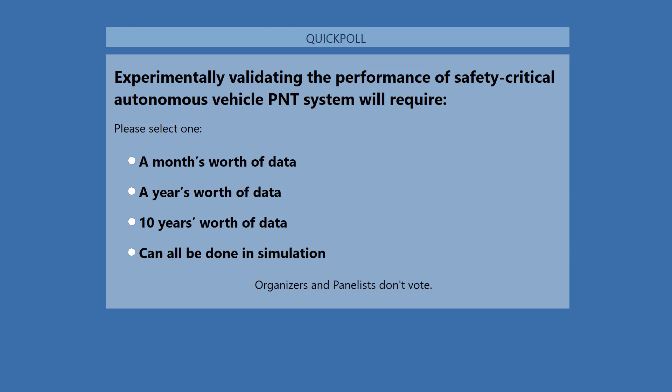Absolutely. Folks, coming up on your screen is that first poll: experimentally validating the performance of a safety critical autonomous vehicle PNT system will require. If you wouldn't mind going ahead and selecting one of the following responses: a month's worth of data, a year's worth of data, 10 years worth of data, or can all be done in simulation.

So looks like we have 1% weighing in with a month, 39% saying a year, our front runner there, 32% saying 10 years, and 27% saying it can all be done in simulation.

Demoz, any thoughts there on the responses? That's an interesting spread, and I think quite a few of our audience members are going to be kind of surprised by what they hear today from our panelists.

So let's go ahead and dive into our first presenter, and it's going to be Matthew Spenko, who is an associate professor in mechanical materials and aerospace engineering at the Illinois Institute of Technology. Professor Spenko earned a BS degree in mechanical engineering from Northwestern University and a master's and PhD in mechanical engineering, both from the Massachusetts Institute of Technology. He was an intelligence community postdoctoral scholar at the Mechanical Engineering Department Center for Design Research at Stanford University from 2005 to 2007. Since 2007, he's been a faculty member at IIT.

His research is in the general area of robotics with specific attention to mobility in challenging environments and navigation safety. He's a member of the IEEE and an associate editor of the Journal of Field Robotics. His work has been featured in many popular media outlets such as the New York Times, CNET, and Discovery News. And examples of his work are on display at the Robot Revolution, a traveling exhibit currently at the Oregon Museum of Science and Industry. Matt, welcome.

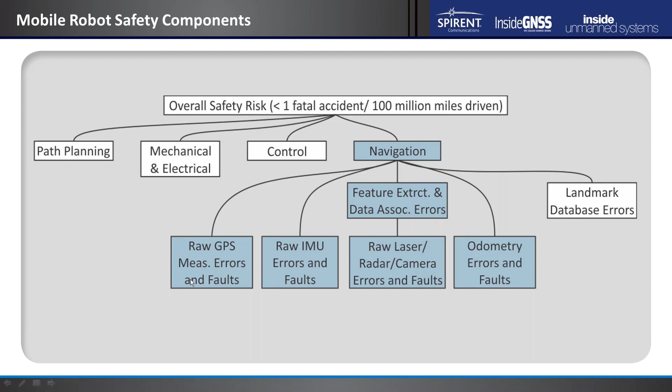And then over on the right-hand side here, we have landmark database errors. Obviously, the map that you have of your landmarks may contain errors, but again, we don't really focus on those. We really focus on these terms in the light blue boxes right here.

One of the things we want to ask ourselves is, before we go off and do any analytical work, can we do this all experimentally? There's a lot of different analysis done on this.

I'm presenting some work done in 2016, and the authors posed the question: how many miles would have to be driven without failure to demonstrate with 95% confidence that the failure rate is less than the current failure rate, or 20% better than the current failure rate?

And the failure rate I'm talking about here is fatalities, automobile fatalities. In the US alone, it jumps between about 35,000 and 40,000 auto fatalities per year, and about 90% of those are attributed to human error.

And when you look over on the right-hand side here, you see these large numbers of miles, 275 million or 11 billion miles. These are huge numbers.

And when you look and see what the manufacturers are doing, we're not even close. I think Waymo just announced, maybe a month ago, that they're up to about 8 million miles driven, which is extremely impressive.

And there is—so I don't want to take away from that—but even if you don't agree exactly with these authors' analysis, you're still looking at orders of magnitude difference between what we're able to achieve and what we actually need.

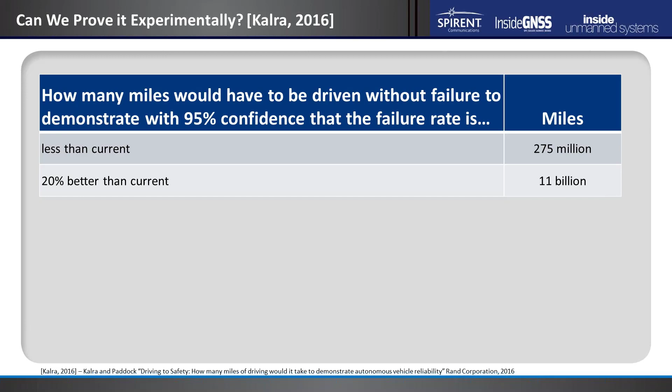And the real kicker here is when you want to prove safety through experimental work, you can't make any changes. So anytime you make a change to your algorithm or update your sensor, you've got to start that clock over again. So instead of doing that, we're looking at taking inspiration from the aviation industry.

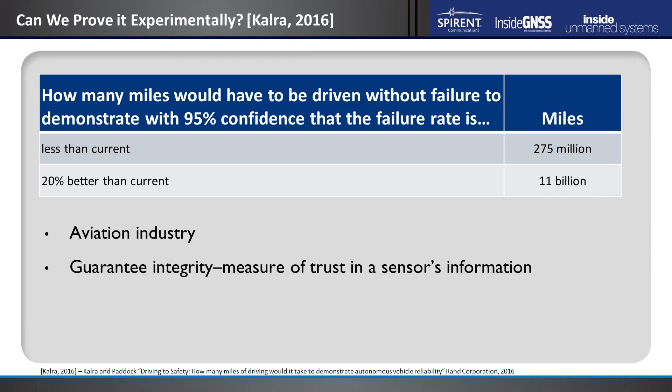I don't come from aviation and the navigation safety community—I come from a robotics background. My collaborator comes from the aviation side, so we're looking to take inspiration from him and look at guaranteeing integrity, which is a measure of trust in a sensor's information.

So there are some distinct difficulties in adopting aviation safety methods to terrestrial robots. Up here on this chart, I have an example of what we're trying to do. We have a robot on the left that's our current time pose. Pose is position and heading.

And on the right, we have some future—we're going to predict our pose into the future. And then we have an alert limit requirement box. So basically what we're trying to ask ourselves is, what is the probability that our future pose is going to lie outside of that alert limit requirement box?

And for a self-driving car, this might be—let's say the lateral limit might be the size of the lane that you're traveling in. So we have three unique challenges here when we're trying to adopt these aviation standards or techniques into ground robots.

The first one is that GNSS alone is insufficient. We are going to be operating in a lot of GNSS-denied areas, and thus we need the multi-sensor system, the sensors that I talked about a couple slides ago.

The second one is that in aviation, our integrity risk peaks at landing, and that is no longer the case. We now need to have continuous risk monitoring for terrestrial robots.

The last one is that we have unpredictable measurement availability. In aviation, you're landing on well-defined, carefully maintained airports, and you can control the environment extremely well.

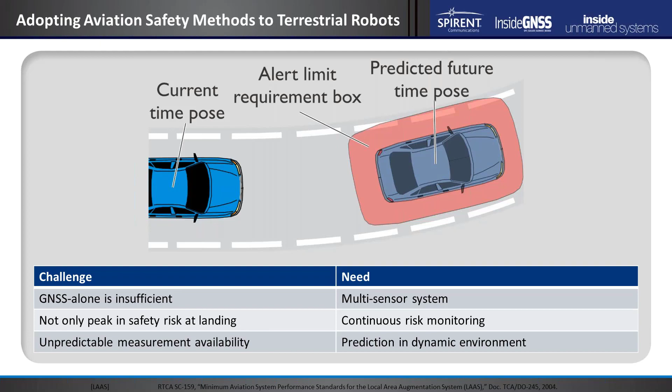In mobile robot applications, we need to operate in a dynamic environment. We have construction going on, we have people walking in front of landmarks and features that we want to extract, we have other cars, we have cyclists. So we have all these dynamic moving environment elements that we have to account for.

So to give you an example of what I'm talking about with feature extraction and data association, this is just a simple test we've done. On the left-hand side, we've got a little cart that has LiDARs, GPS, and an inertial navigation system on it, being pulled around in a field with trees. On the right-hand side, you can see the LiDAR point clouds, and everything popping up in red is a feature we've extracted from the environment.

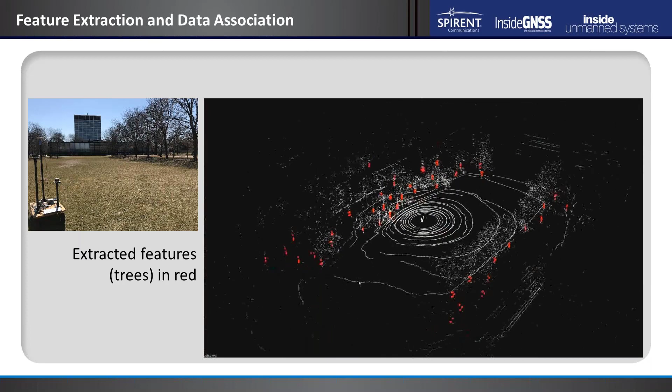These are going to be associated with those trees. You can see some of these features popping in and out depending on the data frame. As this vehicle moves around, these features are moving in and out of our field of view, so a lot of challenges just in that.

So what are some of the faults that might occur in feature extraction and data association algorithms? We call them landmark faults, and we can break them down into two categories. The first one is a feature fault, meaning a landmark is associated with a wrongly extracted feature.

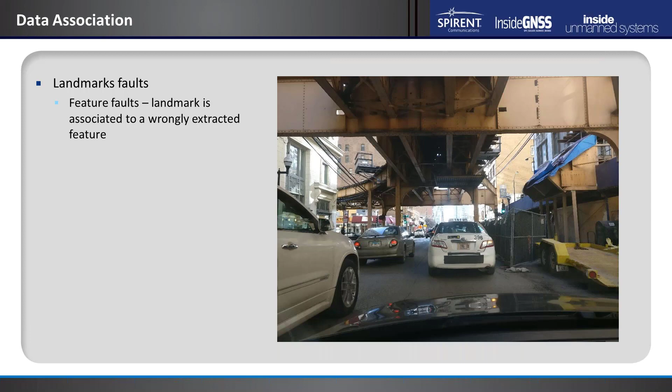On the right-hand side here I have a picture I took from my car in downtown Chicago. This would be a very difficult scene for a self-driving car to operate in. You can see our L tracks overhead, and even without them we'd still have tall buildings creating a GNSS denied environment. We also have construction and a lot of cars moving.

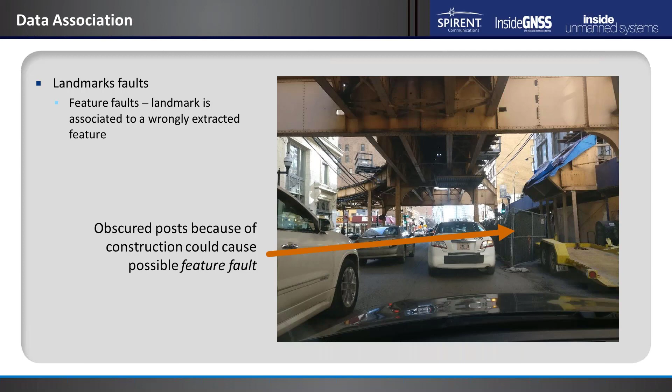When we take a look at these feature faults, one example might be that we have some obscured posts we'd want to extract, that we'd expect to be there, but we have all this construction on the right-hand side. So these might cause a possible feature fault.

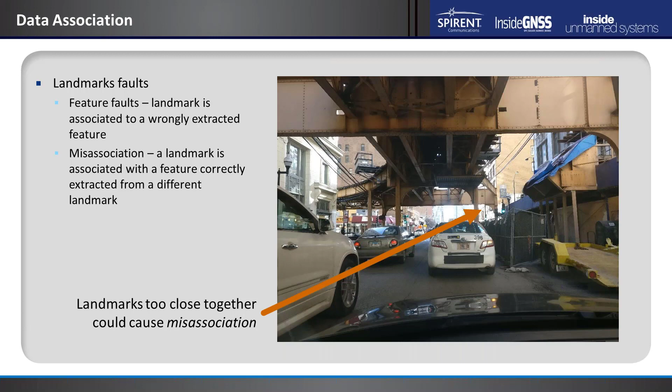The second type of landmark fault is a misassociation fault, where a landmark is associated with a feature correctly extracted from a different landmark. An example of that might be posts that are too close together, which could cause a misassociation.

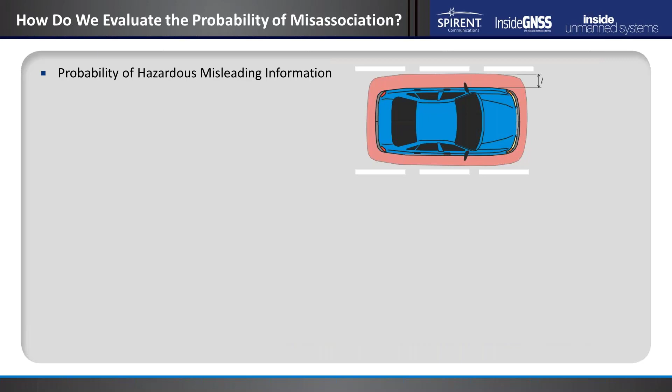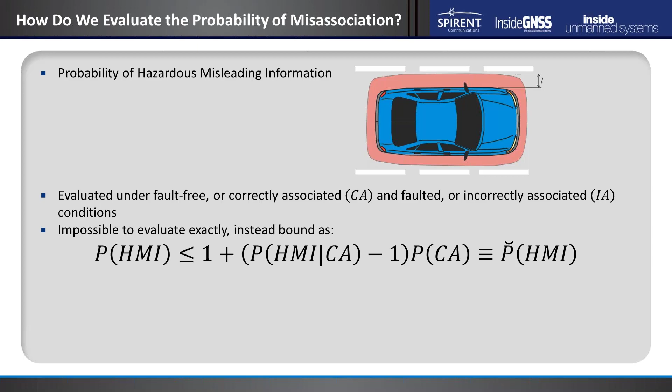So how do we evaluate the probability of hazardous misleading information from misassociation? We're looking at, like I talked about before, the probability of being outside that alert limit box. We evaluate it under fault-free and incorrectly associated conditions.

Now I'm going to throw a couple equations up here. Don't get thrown off by them. We're going to look at a couple terms and see what we can tease out of them. One of them bounds our probability of hazardous misleading information — this term on the right, which is set by some safety requirements from a regulating agency.

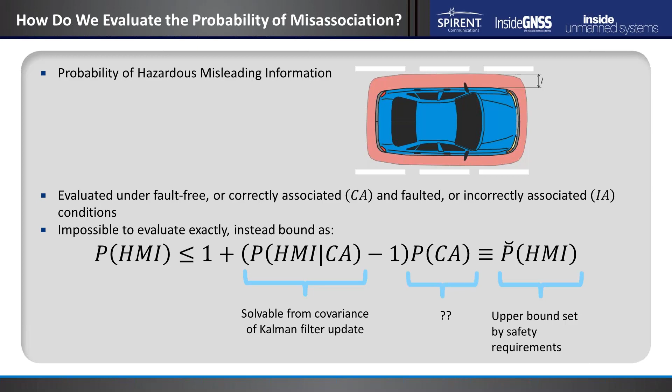Then we have two more terms. One we can solve from our Kalman filter covariance. The second one is the key though — this is trying to identify the probability of making a correct association with these landmarks.

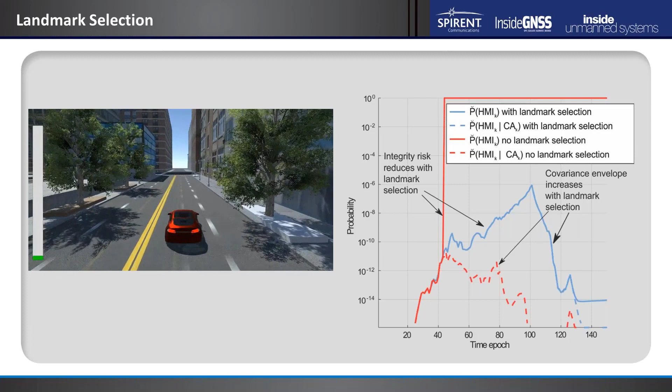But if we look at this solid blue line, we're actually calculating our probability of hazardous misleading information while accounting for landmark separation, and we're then able to lower our probability of hazardous misleading information by essentially throwing out landmarks that aren't well separated.

So to finish off, I'd just like to acknowledge my students in my lab, especially Guillermo Arana, who most of this work is based on, as well as my collaborator, Professor Mathieu Joerger at the University of Arizona. So now back to you, Demoz.

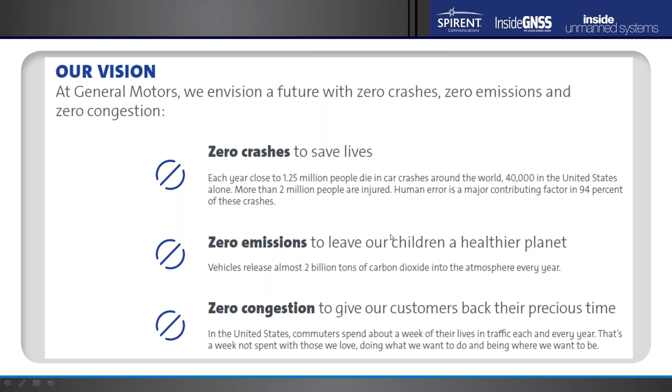Our mission and vision within General Motors as a global car maker is summarized in this slide. When we wake up in the morning and commute to work, these are the thoughts that drive and motivate us in this rapidly changing world of automotive transportation. We have a vision of zero crashes, and robotic principles and autonomous vehicles factor into that. We have a vision of zero emissions, so we'll continue to invest and lead in electric vehicles. And we have a vision of zero congestion. So as the world becomes more urban and greater dependence on ride sharing becomes more pronounced, GM's committed to being a part of the solution for the 21st and 22nd centuries.

So I wanted to do a survey here of sensors that are found and used today on autonomous and semi-autonomous vehicles, and talk a little bit about the pros and cons of each of these sensor types.

At GM, we view sensors in two categories. We have perception sensors that use remote sensing capabilities to localize a vehicle in a relative sense. How far away am I from a curb or a stop sign or an intersection? We solve that problem with radar, LiDAR, and cameras. Then we've got another classification of sensors responsible for positioning the vehicle in an absolute sense with respect to a well-established reference datum such as WGS84 or ITRF 2000. Where is this vehicle on planet Earth with a prescribed latitude, longitude, and elevation? We perform those functions with high definition maps, with motion sensors such as gyroscope, accelerometer components, wheel ticks, and of course GNSS.

GPS, GLONASS, Galileo. A few years ago, I'd say 18 to 24 months ago, there was a debate within the automotive industry about which class of sensors was more important. What I've come to realize, and what we've learned at General Motors, is it's really not an appropriate question. What we've come to believe now and are committed to is we need all of these things. There is value and purpose in relative positioning, a vehicle with respect to known landmarks and objects on the roadway, and there's high importance in absolute localization - where is this vehicle with respect to a map that gives us a good perspective of the road ahead?

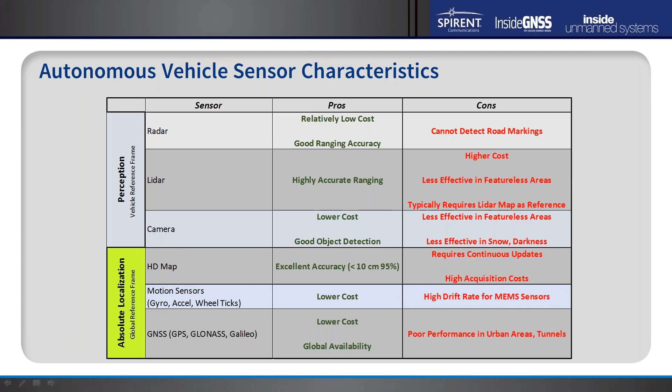These components on a car typically have lower costs and global availability. As Matthew mentioned in his presentation, GNSS suffers in urban areas and tunnels, and these are areas where customers are not going to be forgiving of issues with autonomous vehicles. So we need to complement the weaknesses of GNSS with the other sensors on this slide.

So this is a pictorial view of how we fuse information from these disparate sensors into a combined solution. On the left side, I've grouped again our perception sensors: LiDAR, camera, radar. On the right side, we complement those relative positioning sensors with absolute localization sensors, including GNSS, inertial measurement units, and a precise map.

If we go counterclockwise here, LiDAR, as I mentioned before, is characterized by creating a point cloud picture of your surrounding environment using laser returns, where we look at the reflected intensity and range of return of those signals to construct an artificial reality.

Cameras are similar. Camera can perform signal processing to identify object data, such as paint stripes or road signs, that can be cross-checked against a database of those objects stored in a map. And then radar is an excellent sensor for long-range and short-range detection of both permanent and stationary objects.

On the right side, I've spent a lot of my time over the last several years improving GNSS. What we've learned here at General Motors and what we've publicly advertised is our ability to achieve more precise localization by applying corrections. Our Super Cruise vehicle, which I'll show a slide for, achieves superior location performance by applying real-time clock, orbit, ionosphere, and troposphere corrections to the raw observables that we receive today from 2 constellations.

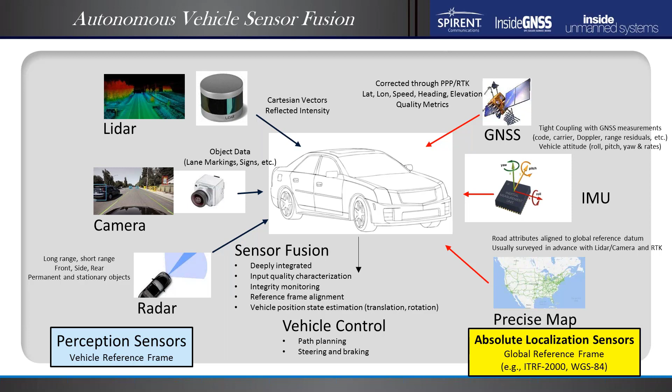So when we know where the car is, that allows us to perform the control functions such as path planning, trajectory control, steering, and braking, those functions that are a critical part of any autonomous car.

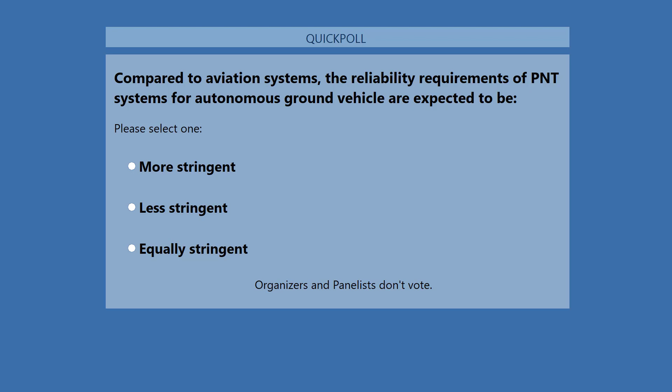On the screen, we've got that second poll. Compared to aviation systems, the reliability requirements of PNT systems for autonomous ground vehicles are expected to be more stringent, less stringent, or equally stringent.

Well, what do you think there, Demoz? After Matthew's presentation, I think folks are seeing how challenging it could be for automotive applications, and a lot of them show that it'd be more stringent. Kind of interesting.

So with that, let's move on to the second half, and I'm going to give the floor back to Curtis to tell us a little bit more about the practical considerations for test and development. Curtis?

Okay, very good. I tend to agree with the choice of our audience on that last question. It's a demanding environment to be operating in for an autonomous vehicle. So let's talk a bit about connectivity. Matthew mentioned the importance of keeping our sensor information fresh, keeping our map updated. So there's an important role to play for connectivity.

A vehicle such as Super Cruise, which I'll describe on the next slide as an example - these are all functions that are enabled by either 4G, LTE, or some other form of cellular communication. That can either be raw satellite measurement information or delivery of corrections, or Wi-Fi for offboarding or receiving large amounts of data for autonomous vehicle purposes.

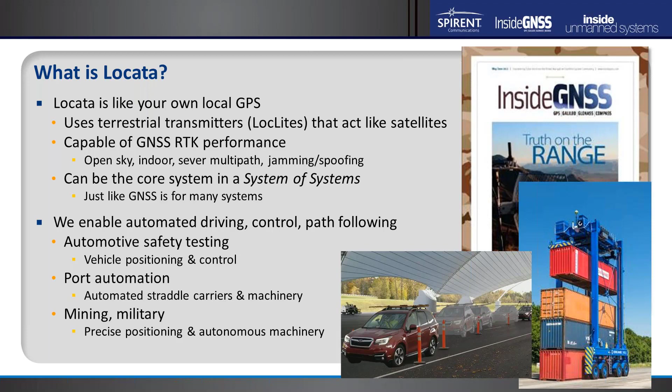So we are a ground-based transmitter system. We work very much like GPS, your own local GPS, we would like to call it. We deliver RTK level performance, centimeters in open sky, and even indoor and severe multipath environments. And we can do the same thing with GPS jamming and spoofing. We can work as a core system in a system of systems, as you will see in my presentation, or we can work as an augmentation to other GNSS as well, much like a part of any constellation in GNSS. We work in several industry segments. You will hear about these, mainly in automotive safety testing, vehicle positioning and control, port automation, and we are also in mining and military industries as well.

So some basics about the technology. Our system is designed as a ground-based line of sight system. Some of the requirements for GNSS to have this line of sight visibility apply to us directly as well. But given we are a ground-based transmitter system, we can customize the accuracy and reliability, and our performance does not change with time like the satellites that move around.

We transmit our signals at 2.4 gigahertz in the current system. Again, being a ground-based system, we can transmit much stronger signals. That gives us more immunity for jamming and other cases. And for our transmitters, we can transmit up to 4 signals. So they are GNSS-like signals with ranging information and nav data.

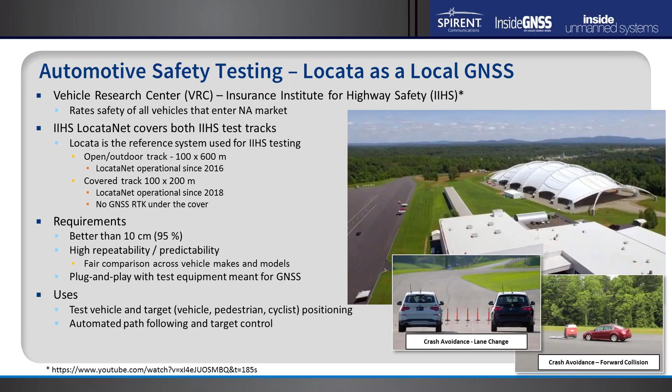They use our system for test vehicle and target positioning, tracking, and control. These targets could be robotic platforms with dummy vehicles, pedestrians, and cyclists, and so on. They also do automated path following, and we'll talk about that in a little bit more detail in a slide that's coming up.

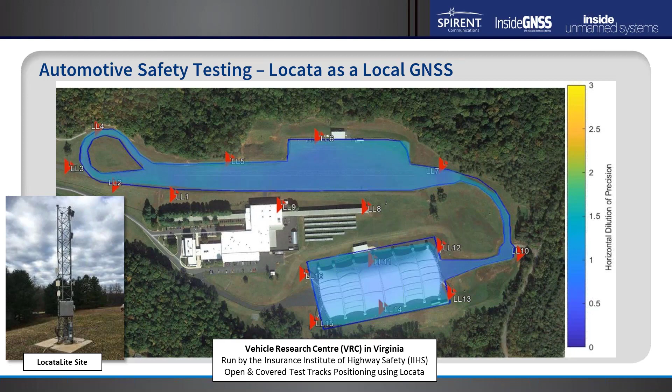Here's a quick view of the network. We have 15 transmitters there in both tracks. You can see a closer look of one of the towers on the left-hand side, that's one of our LocataLite transmitters. And the blue overlay you see is the DOP value by design. Given we have fixed transmitters, we can estimate that and also estimate the reliability and guarantee that performance.

Late last year, we did a demo for IIHS with our partners in automated path following. IIHS is in the process of automating some of their driving tasks because they want to take the driver dependency out of some of the tests. For example, you can imagine if you want to drive a car a certain path and repeat it exactly the same way, it's really hard for a driver to do that. And these systems allow them to do exactly that.

They can record scenarios and replay them over and over again with different settings if they want. So that's exactly what we did. In this case, AB Dynamics, one of our partners, brought in their steering robots and brake and acceleration control robots, as you can see in the pictures.

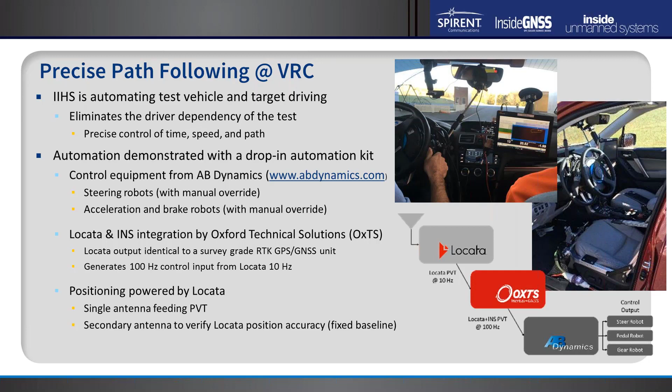They were installed in a car, and our receiver, which looks like an RTK quality GNSS receiver, outputs 10 Hertz data to Oxford Technical Solutions' GNSS INS integration unit. It's the same thing as a GNSS INS unit for us because we output NMEA data. We can output other formats just like a GNSS receiver. So they would take that and output 100 Hertz data for the controls of the AB Dynamics steering robots and control robots. So here's a closer look at one of the test drives that we did.

In this case, we call this the double lane change maneuver. The vehicle comes in the far lane, changes lanes back and forth real quick. This was recorded on the covered track where no GNSS is available and only Locata service is available.

This drive was manually driven, and the barriers were placed only 6 inches away from the side of the car on both sides. That recorded scenario was then replayed 48 times at different speeds, ranging from 10 to 45 kilometers an hour. You can imagine a human driver trying to go through these barriers at 45 over and over again.

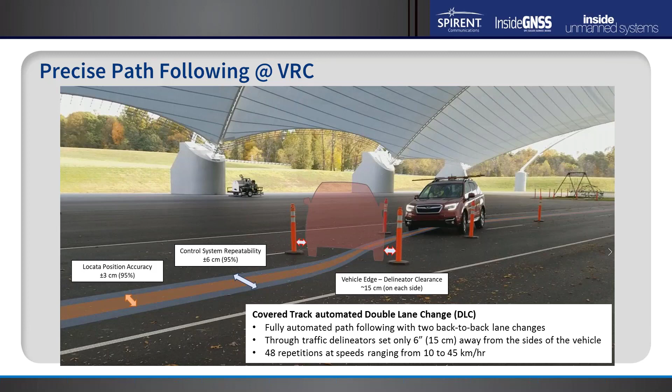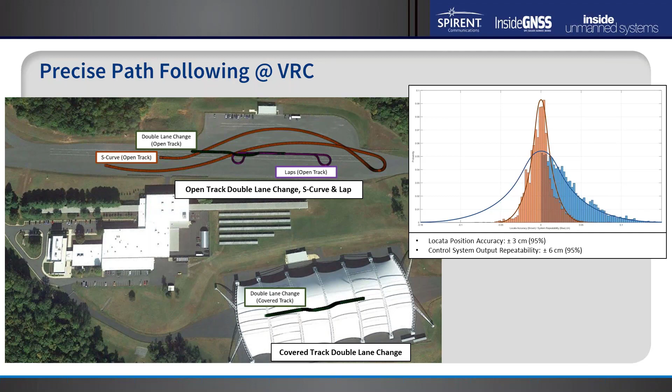We were able to show after 48 repetitions that the Locata system accuracy itself is plus or minus 3 centimeters at 95%. And the overall system, with the controls, was able to repeat everything down to 6 centimeters. So that was just one of the scenarios. We did other drive scenarios that are useful to IIHS, and we were able to show that same accuracy and repeatability can be delivered anywhere on both tracks.

Here's another example, but in this case, Locata is working as an augmentation for GNSS. In deep pit mines, especially when machines are operating close to the wall, it's like an urban canyon. They have visibility limitations, which brings the accuracy down and limits the number of hours the machines can be operated autonomously or precisely.

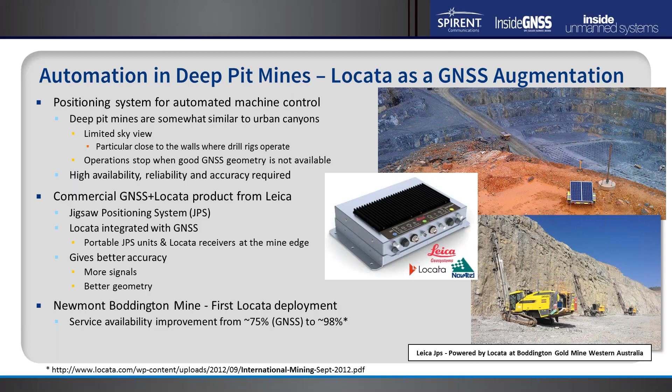That's where this product came in from Leica, JPS. It's basically a NovAtel GNSS board integrated with a Locata receiver in one enclosure. With this, all they have to do is take one of the solar-powered portable units, as you can see in the right-hand side photo, to the top of the pit and start broadcasting Locata signals down into the mine. That gives more signals as well as better geometry. They were able to show that service availability has gone up from 75% to 98%.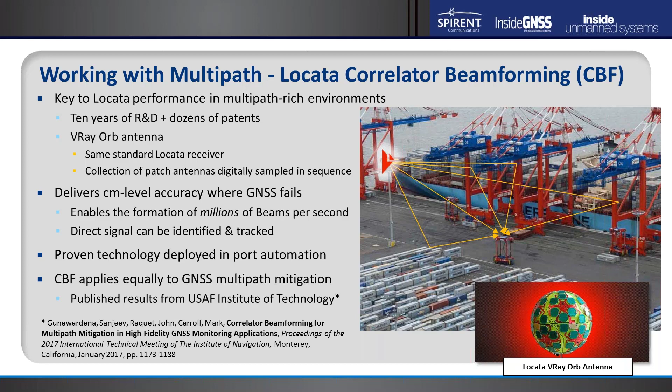Now, with over 10 years of R&D, we have come up with a new technology called VRay. It's a collection of patch antennas, but this special antenna works with our standard receiver. What we can do is sequentially sample these antennas and then basically create a beam — we call this correlator beam forming. We can create millions of these beams, scan the environment, identify the direct signals, and only track the direct signal. This allows us to deliver centimeter level accuracy in these environments.

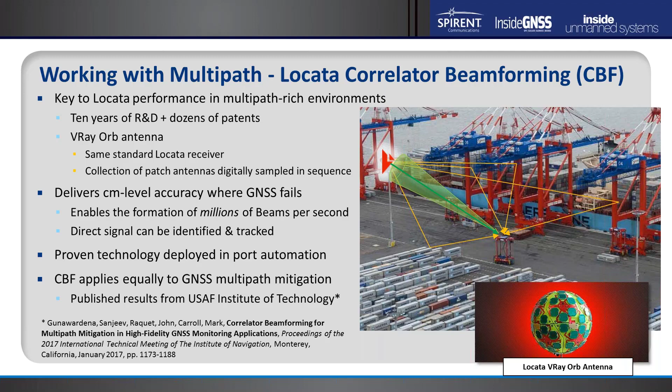This is a proven technology, as you will see in the next slide. The other important aspect I would like to bring up is that this is applicable to GNSS multipath mitigation as well. The US Air Force Institute of Technology has done a study, and they have shown that it can be applied equally well for GNSS.

Locata is a big part in a wave of port technology automation happening around the world. A big part of that is automating these machines that you see on screen. The blue machine is a straddle carrier — this particular one is from Konecranes. These are level 5 automated machines operating fully autonomously without even a crew cabin.

And these can operate side by side with manually operated machines, traveling up to 40 kilometers an hour. They can stack up to 4 containers, as you can see. So we enable all of that with our positioning technology.

We deliver 3 centimeters accuracy at 95% with our VRay technology in this very cluttered environment in terms of multipath. We're becoming pretty much a standard technology, working with multiple OEMs, and other logistic operations will follow after this automation is in place.

On top of giving operators unprecedented accuracy and reliability, we also give them flexibility. In this sort of environment, they've tried GNSS and other sensors like embedded sensors, markers, and so on, and found out that multipath is a problem for GNSS, while other things limit what they can do in terms of infrastructure changes. So we give them the flexibility to modify paths, change anything within the service area, and more importantly, we enable them to do conversion to automation in a running port without stopping operations. That's really important — they don't have to tear up infrastructure, put in new markers, or change things. Once the transmitters are in, they can bring in machines and start changing things as they wish.

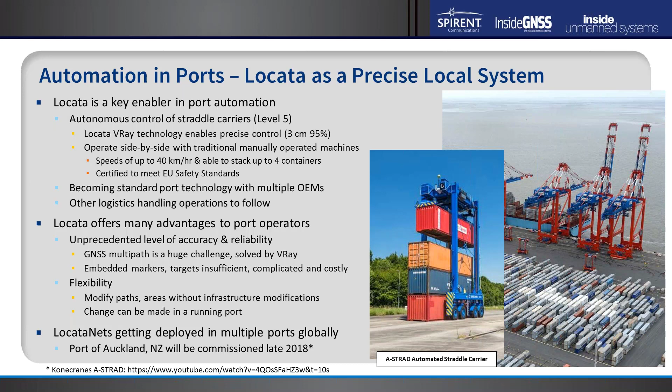The first of these ports will come online, commissioned at the end of this year in New Zealand — Port of Auckland, New Zealand.

Thank you, and back to you, Demos.

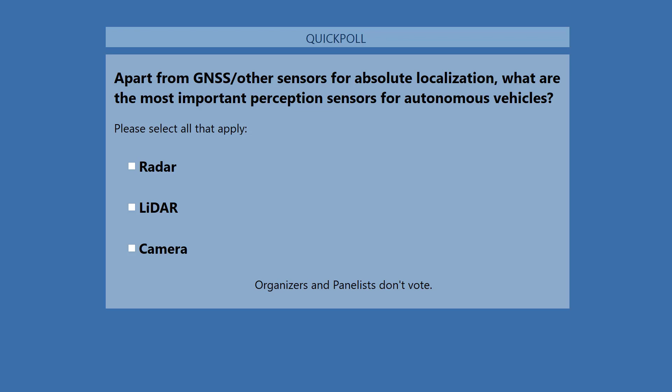30% saying radar, 70% LiDAR, and 74% camera. Any thoughts there, Demos? Not really, but I guess makers of these devices would be interested in this. Well, interesting spread of sensors.